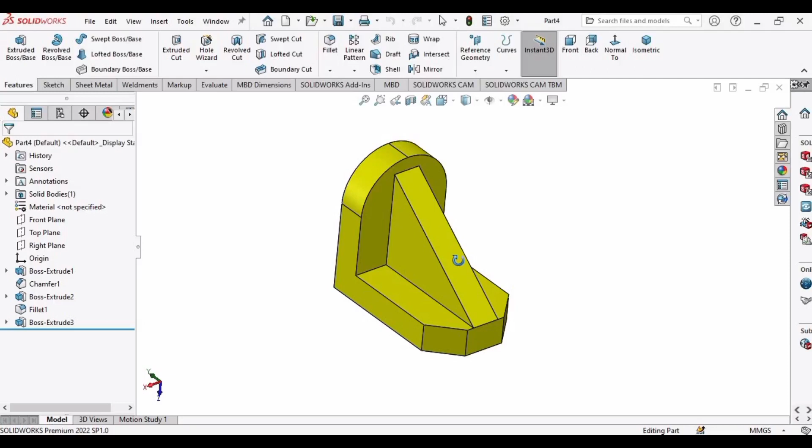In this tutorial video, we will be designing this part. So let's get started.

First of all, select this file, click on New, select Part, click OK. This environment window will be opened.

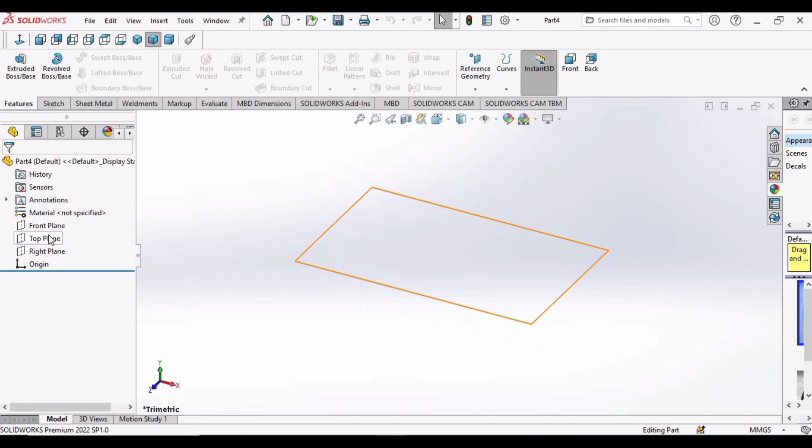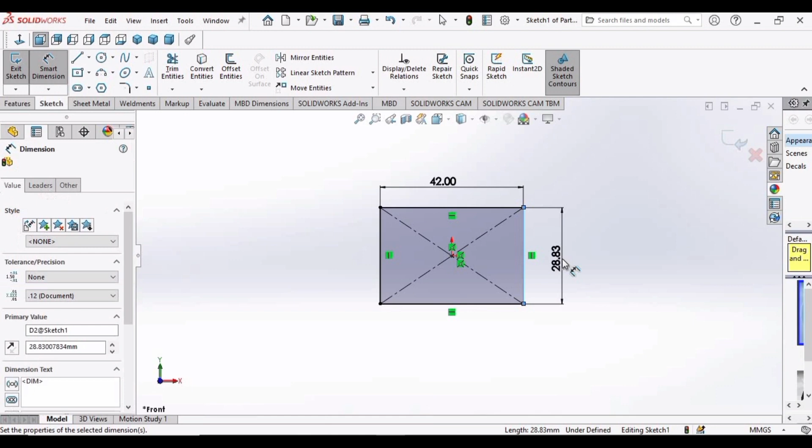After that, select your front plane, click on Sketch option, then select this rectangle and make a rectangle like this. After that, select Smart Dimensions and make this line dimension as 42 millimeter and this line as 66 millimeter.

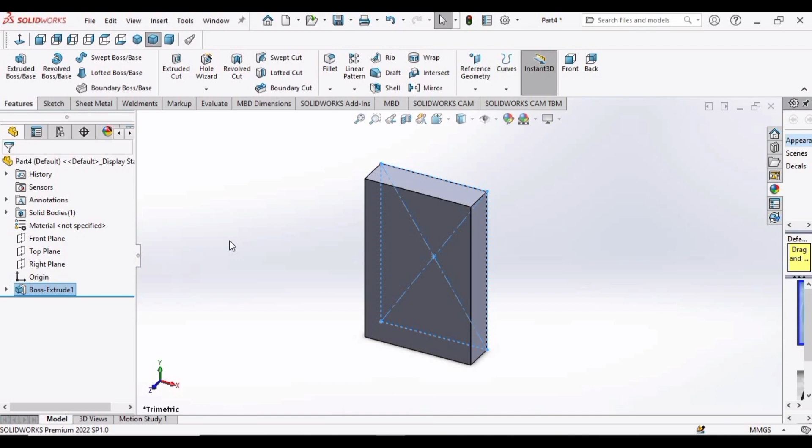After that, click OK. Okay, now select this features option, select this extruded boss base command and set this to 12 millimeter. We will extrude this component to 12 millimeter, and this is our 3D object after extrusion.

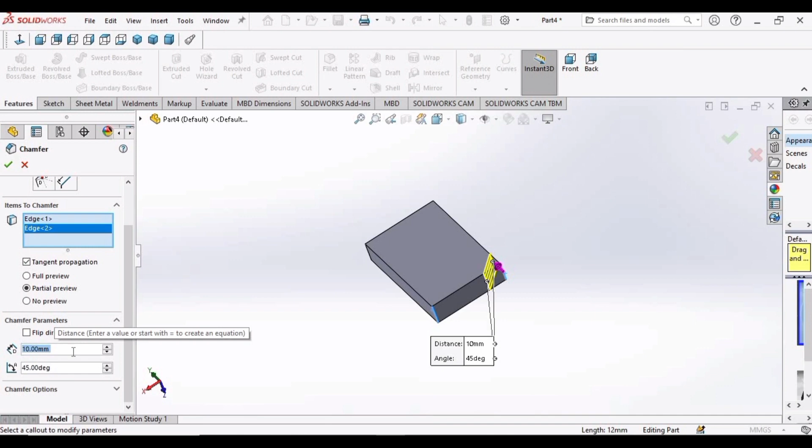Then select this chamfer option. Select this edge, this one, and set this dimension to 12 millimeter. After that, click OK. Now we have this shape after chamfer.

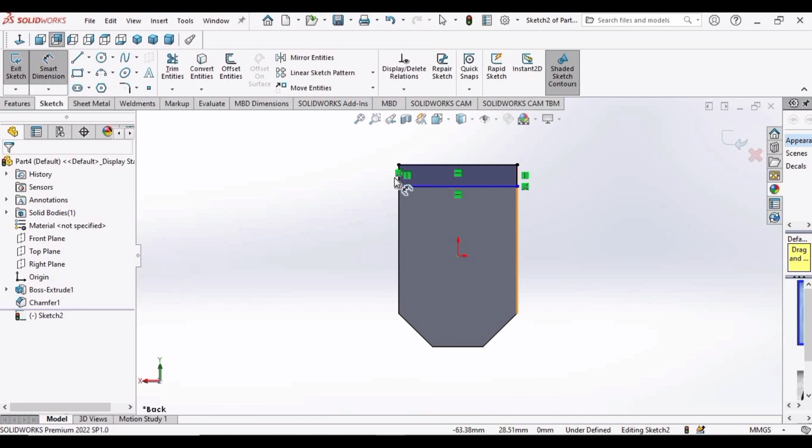Now select this face, click on sketch, and we will be making a corner rectangle. Make a corner rectangle here. Now go to smart dimension and set this line to 12 millimeter.

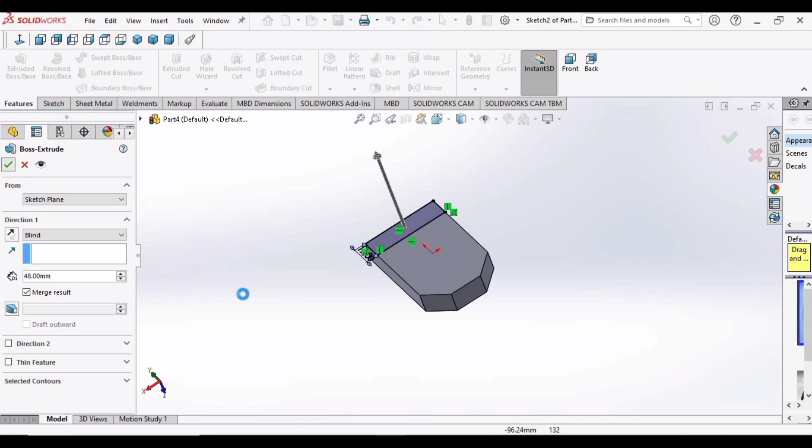Okay, now go to extruded boss again in features and extrude this up to 48 millimeter and then click OK. So we have this geometry now.

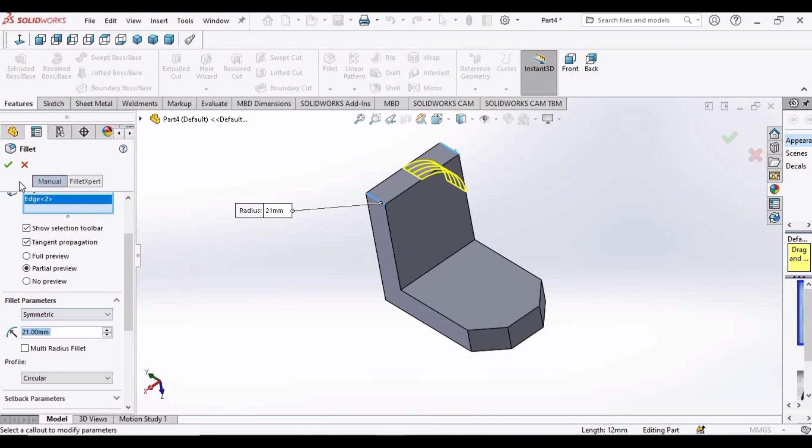Select fillet option. Select this edge, this opposite side edge. These are selected here. Now drag down a little bit and set this to 21 millimeter to give it a round shape. And you can see this round shape has been created using the fillet command.

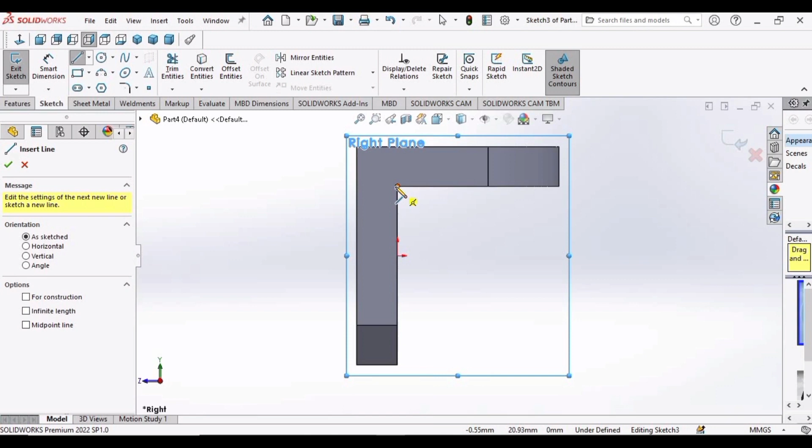Now after that, we will select this plane, right plane. Click on sketch and select a line. Make a line here like this to this corner and then this corner. This is a triangular shape.

Now go to smart dimension and set this line dimension as 42 millimeter and then click OK.

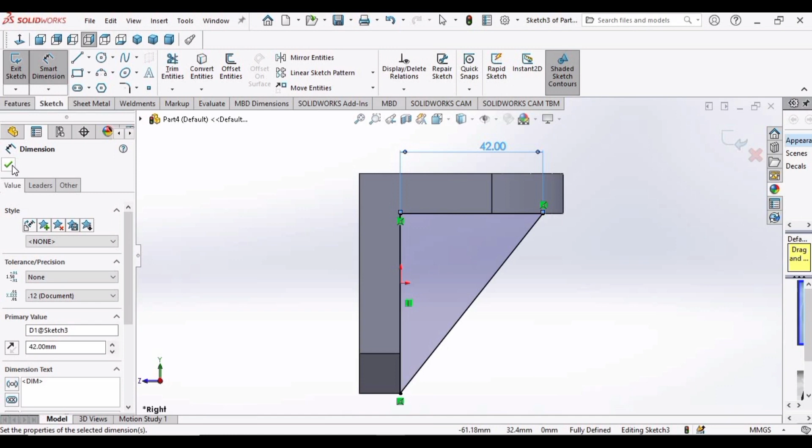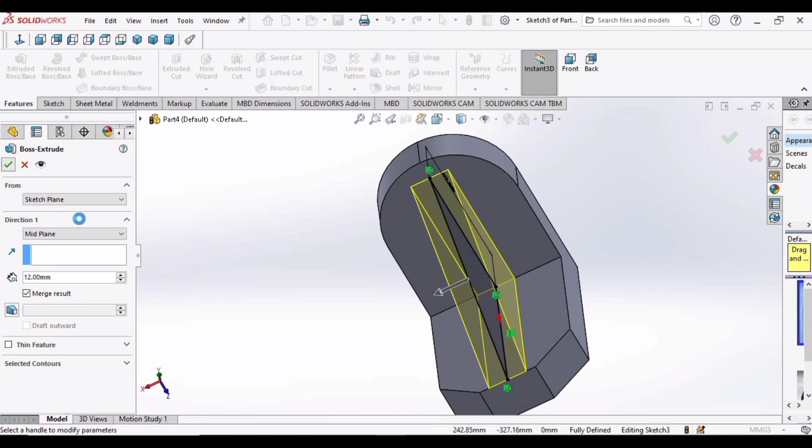Now go to features and extruded boss. Okay, we should select here mid plane option so that this profile can be extruded in both direction like this, and set this dimension to 12 millimeter and click OK. So a triangular profile like this has been created now.

Now let's assign some colors to this part. I am giving this part a yellow color.